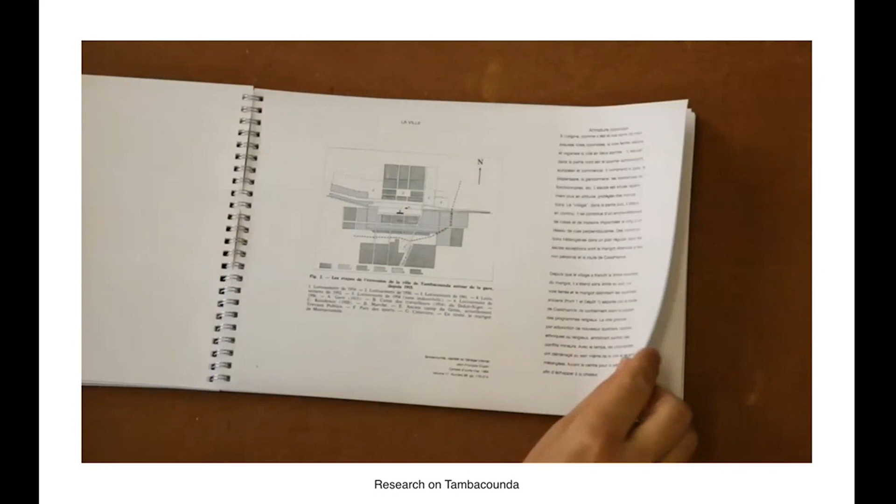So instead of coming with a design proposal, I said, let's meet and come with a team of colleagues and people from my office, and let's study everything about the area. So we looked at the history of the city. We looked at building materials. We looked at local resources. We looked at climate. We looked at the cultural production, the music, the food, and so on.

We tried to learn as much as possible, and we put it together in this kind of book of research, maybe 200 pages. And then we spoke with the doctors, the head of maternity, head of pediatrics, and we asked them, what do you actually need? We asked the nurses, what is the flow of stuff through the hospital?

If you were to draw your hospital, what would it look like? What is the kind of flow of people and of things through the building? And they sketched it out. So this is exactly the sketches that the doctors, heads of their departments, traced on paper, and in a way, we just translated it into, let's say, a more regular flow chart, one can say.

And we spoke with administration and the contractors, potential contractors, and so on. And only then we went back to Switzerland and sat down and thought, okay, with all of this accumulated information, what can we do? What would be, let's say, a wise or interesting step to start developing a design? So this was very, very important for us. We don't start with design. We start with listening or with observing.

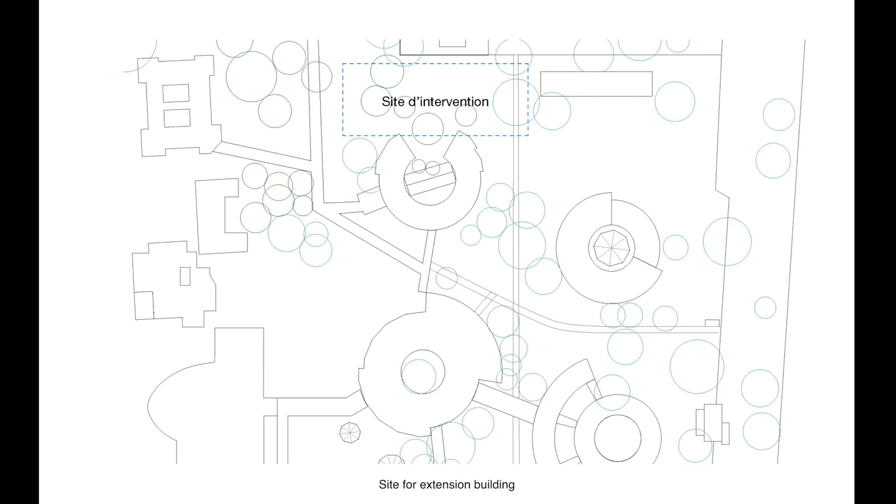And then eventually we, of course, did develop a design proposal. After several weeks, we were given a site which was on the north of this arrangement of circular existing buildings, and our design proposal was based on two main form-giving factors. One is, we said we wanted to make the building as long as possible, and we wanted to make the building as narrow or as thin as possible.

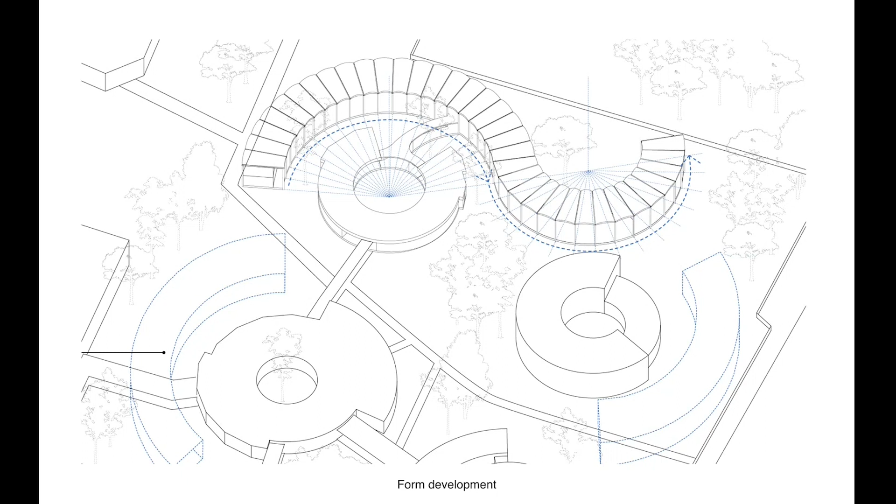And then, of course, the third element that comes in is this circular or curvilinear shape that is a reaction to the existing context, to the circular buildings that it embraces, wraps around, creating new spaces, new courtyards, and could potentially also in the future be used as further extensions. But going back to the idea of making a building as long as possible and as thin as possible, the length is in a way a function of social interaction.

When patients come to the hospital, they don't come on their own. And they often come from quite far away. They come from villages that are a couple of hours of drive or maybe a day of travel, and they usually come with their families. So it's a hospital with about 150 beds, and you can imagine that if everybody comes with a family, there's a lot of people.

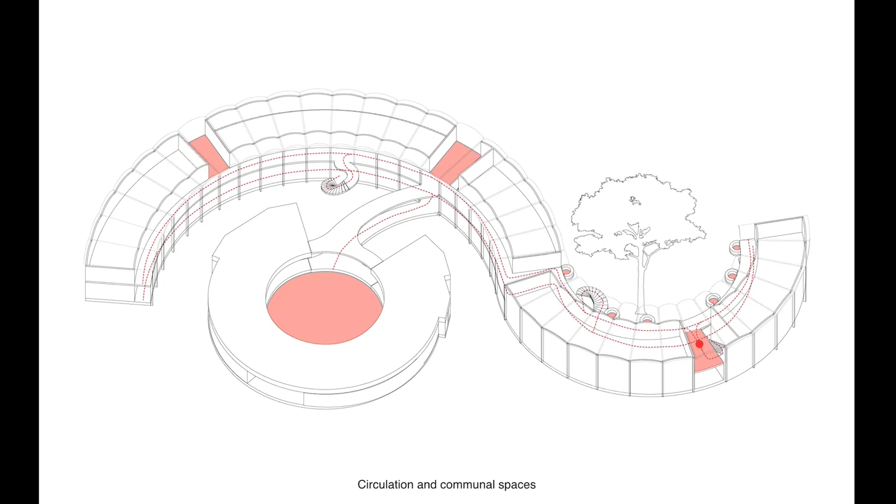So we wanted to create a lot of social spaces for interaction, spaces for lingering, spaces for waiting, spaces for playing, new courtyards, spaces of different sizes, large and small, extroverted and introverted. And this all takes place along this long corridor, long spine that is always on the concave side of the curve. And the thinness is in a way a function of climate, a reaction to climate.

We wanted to create a hospital building that is more or less independent of energy needs, that at least reduces the pressure and the demand on energy and reduces the demand on artificial cooling. So by making a building very narrow, we have a corridor and rooms only to one side. We could, through architecture, create a system of cross ventilation, where through a series of brise-soleil louvers and openings, the wind can pass through the building, keeping the rain out, keeping the sun out.

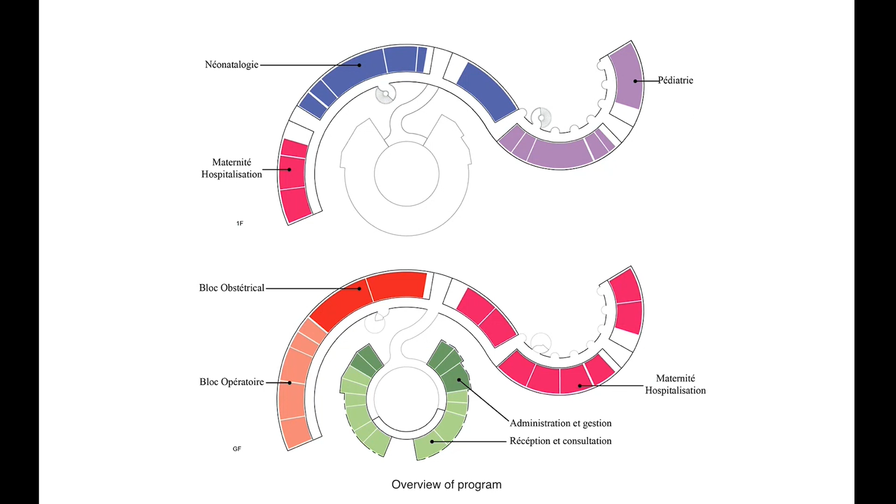Actually, Tambacounda is not only hot, but also there's very little wind. And through this brise-soleil, we create temperature difference, and temperature difference translates into air movement, and therefore the building itself becomes a little bit of its own climate machine, or creates its own microclimate, because there's always different parts of the building that are shaded or non-shaded, and then the air passing through the thinness of the building, with a double vaulted roof.

We have an exterior roof that protects from the sun, and an interior roof with openings. We also have a chimney effect and convection of air rising up. So these were all thoughts that we developed in a proposal, and we thought, we better test it out. There's a lot that depends on this brise-soleil wall: how much rain will pass through, how much sun will pass through, how much wind will pass through, and we were thinking that it's quite a risk, and we can't do that just from paper.

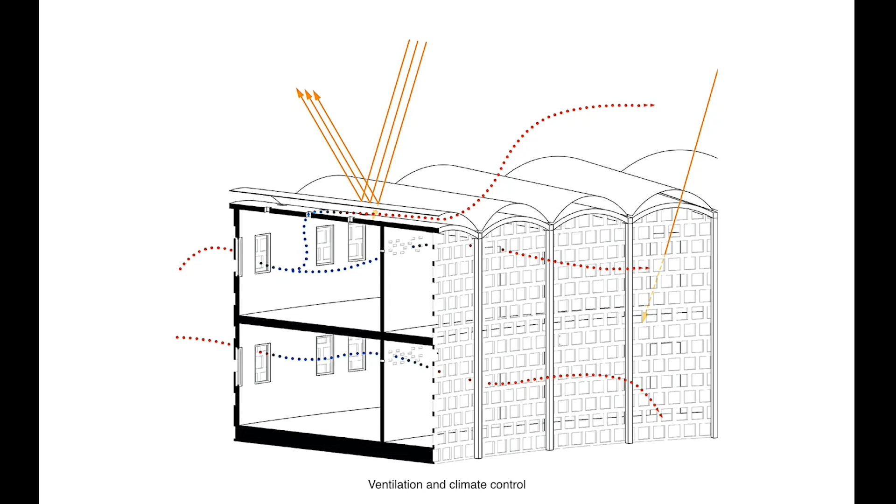So we developed something, or we proposed something that is very, let's say, coming from the logic of, again, without using too much cliches, a kind of Western perspective. We asked the contractor, can you build a test facade? Now, that's something very, very common. I guess you also have it here with many big buildings.

When you want to test how they will look in reality, you say, okay, I don't know, 10, 20 square meters, you build one-to-one exactly in the materiality, scale and so on, as the final building, to test on the site itself how that facade will look and perform. And that's exactly what we told Magueye Ba, the contractor.

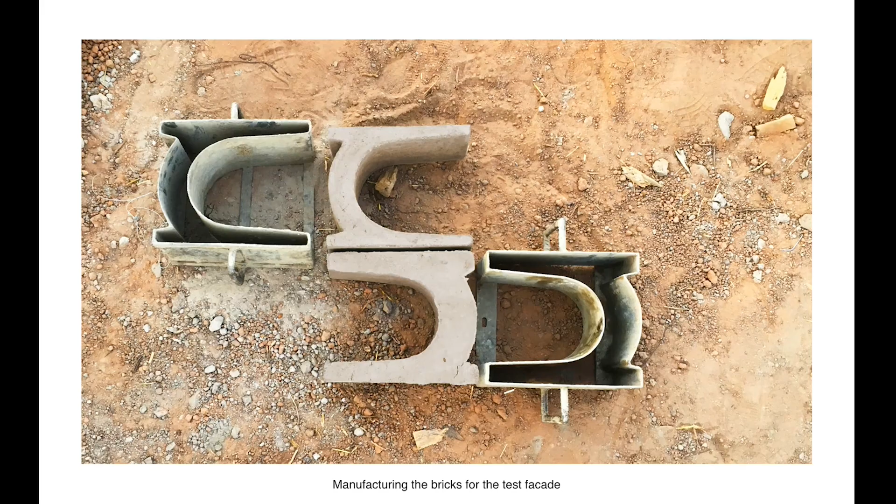I sent him drawings, 10 meters wide, 4 meters high, and I indicated the spot on the compound of the hospital where that test facade should be constructed, and different shapes of the perforated brick. And here you see two. We wanted to test out 4 different brick geometries with slightly different openings and slightly different geometries. How many bricks could you do per hour, and so on. And then a week or so later, he sent us back this photograph.

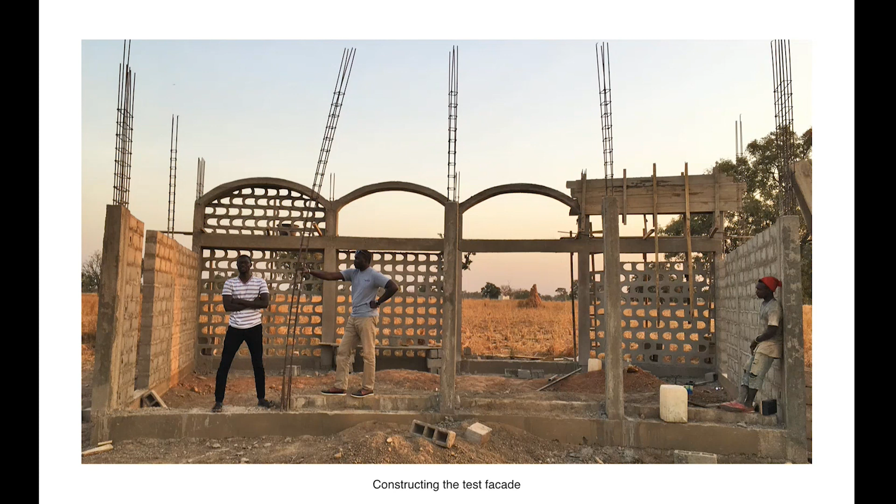And I thought, okay, looks good, but it's a little bit more than I sent him, because I had sent him a drawing that shows exactly this wall, but he was clearly building a little bit more than that. And I also noticed that the site is clearly not on the site of the hospital. It's somewhere else, I don't know where, but it's not the hospital site. Okay. And then another week or so later, he sent us back the finished wall, and it was this.

What in fact Magueye Ba had done was he knew that a small village 50 kilometers south of Tambacounda needed a school. And he thought, why do you build a test facade that you would look at for an hour or two and then tear down again if you can just extend the one wall by 3 other walls and put a roof over, and voila, you have a school.

So he kind of kidnapped the drawings for the test facade and by himself, quite sneakily, without telling me, created the school, which in a way is absolutely genius, because of course we get something that is of much more use, and now this village has a new school which is perfectly ventilated, and we can do a long-term study of how the bricks actually perform over time and in different seasons.

And in a way it's a beautiful way of doing architecture where you're not in control, where you have hybrid program, hybrid function, and hybrid authorship that in a way produces a result that is much more meaningful and maybe also much more beautiful than what I could have come up with or what I did come up with. And it is only through this kind of almost unknown collaboration, unknown to me, that produced this little school in Sarasidi.

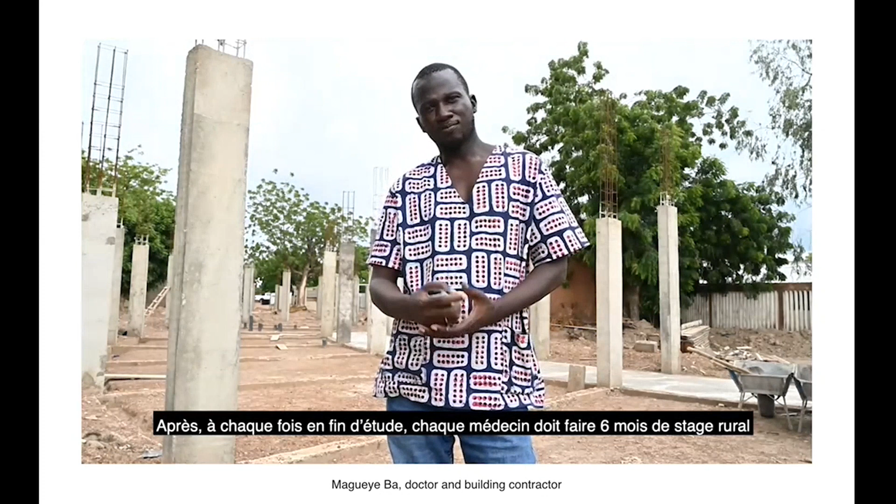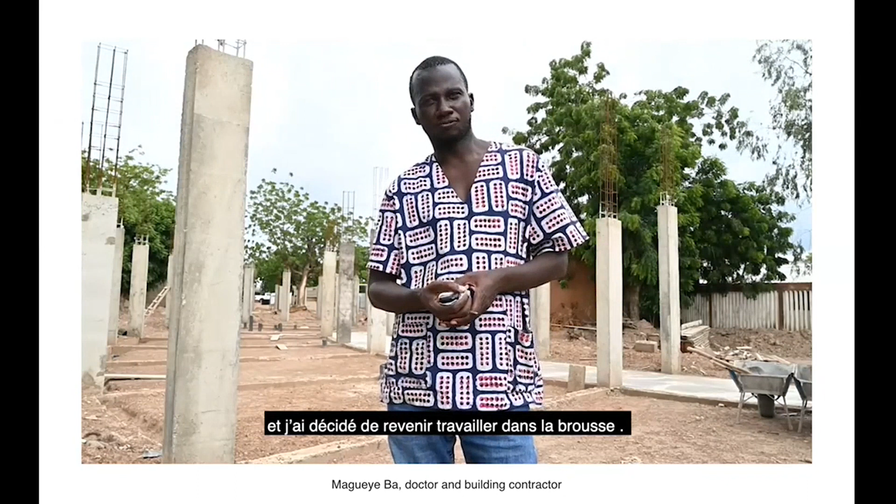This is Magueye Ba with a very cool shirt, who is the contractor, who in fact is not only a contractor, but who is also a medical doctor. So by daytime, he's a medical doctor in the villages south of Tambacounda, and because he was building clinics, rural clinics across eastern Senegal, he discovered, in a way, his talent of organizing construction sites, and discovered that this is also a second area where he can and wants to become active, so he is a medical doctor by daytime and a contractor by afternoon and evening time.

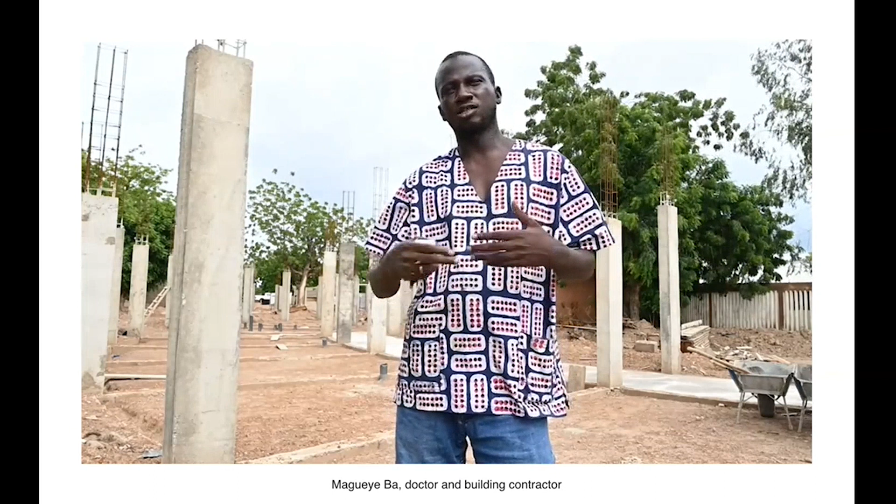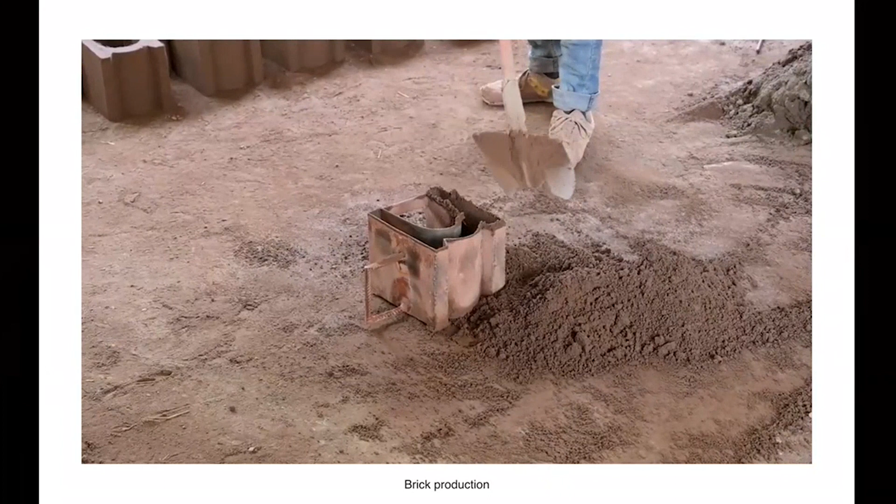And in a way, out of this initial, let's say, collaborative project, developed a wonderful collaboration overall in building the hospital, and eventually doing much more. It is based on this brick. The brick is, let's say, the smallest unit of this collaboration.

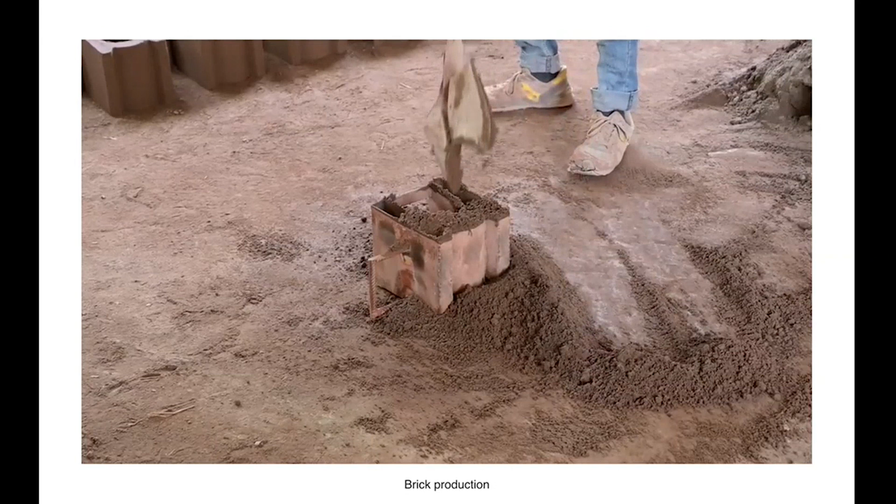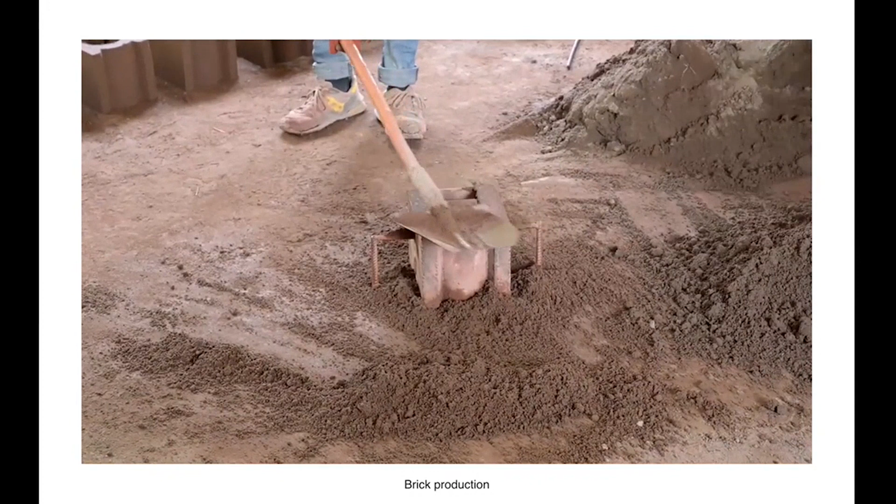It's a cement-based brick. It's not clay. It's not burnt in the oven. It's cement-based, so it's just compressed and dries in the sun, or dries in the air. And it is from this very shape that the construction workers produced eventually 40,000 bricks over the period of a year and a half, producing all the bricks for the hospital.

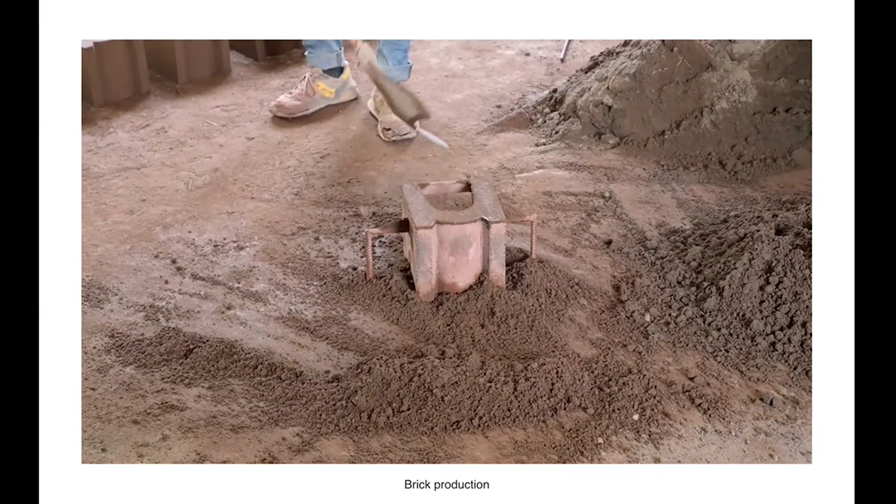I say this also because for us it was extremely important that everything is produced on site, that all the materials are coming from mostly eastern Senegal or the wider areas of Senegal. Nothing apart from the X-ray machine is imported into Senegal from other countries.

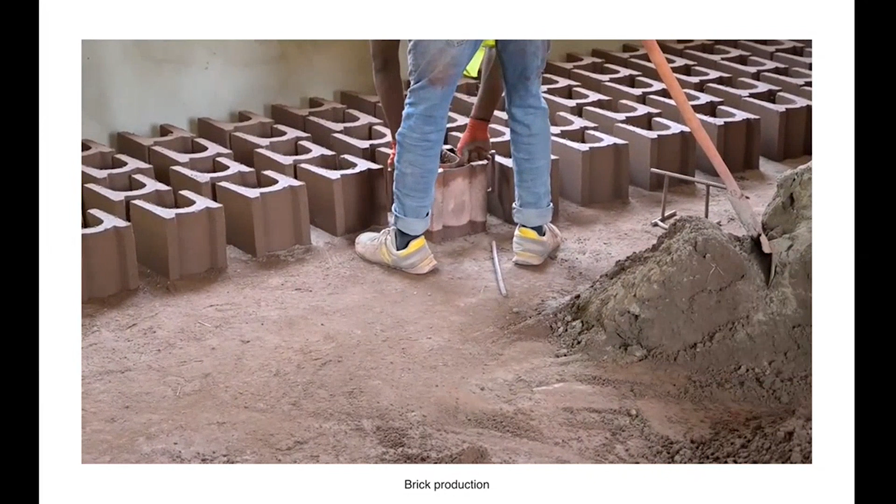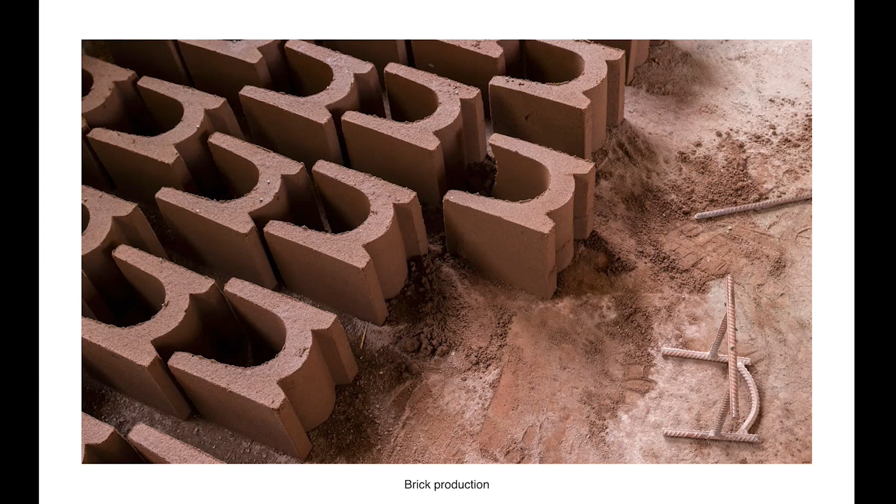We tried to produce everything with local resources. Eventually, as I said, the construction workers made many thousands of these bricks, and we started constructing and building the hospital.

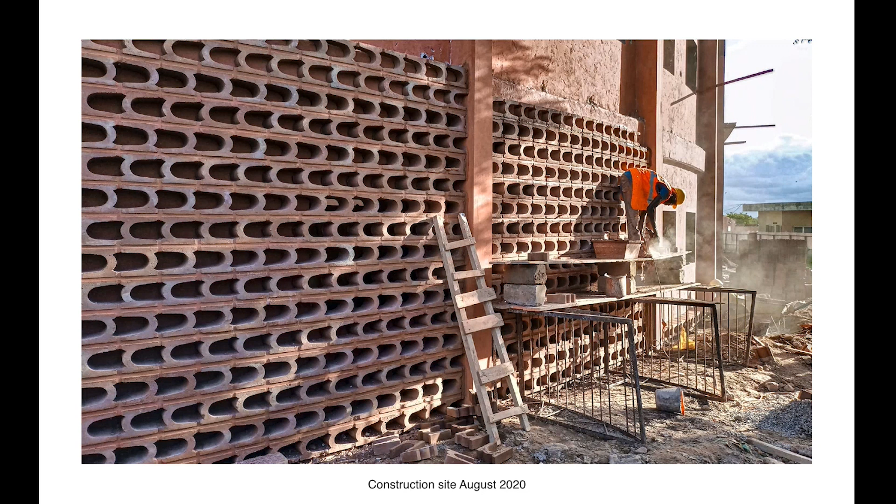And we worked with a foundation that had been active in Eastern Senegal for the last 15 years to develop additional programs. So what we are working on at the moment, for example, is staff housing for the medical staff of the hospital. Tambacounda, even though it's a fascinating city, is not very popular amongst many Senegalese doctors. The medical community mostly studies in Dakar and often has all their family in Dakar. And for them to live 8 hours away from Dakar is not so popular.

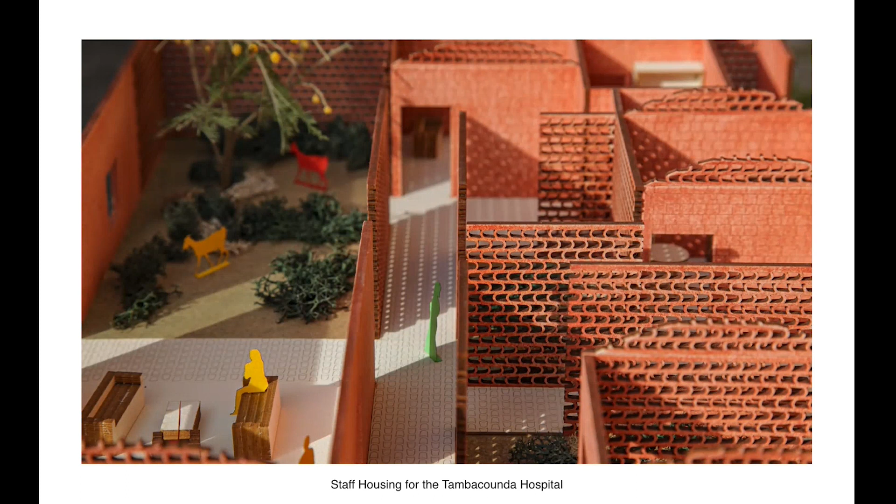And Tambacounda also doesn't have high quality apartments. So we thought by designing and building apartments, it will make the city more attractive to medical staff. It will enable medical staff to stay longer in Tambacounda, not giving up after half a year and moving back to Dakar, but maybe staying for 1 or 2 or 3 years. And this immediately translates into the quality of public health if the staff of the hospital is more stable and doesn't rotate so quickly. So this is something that we are working on at the moment.

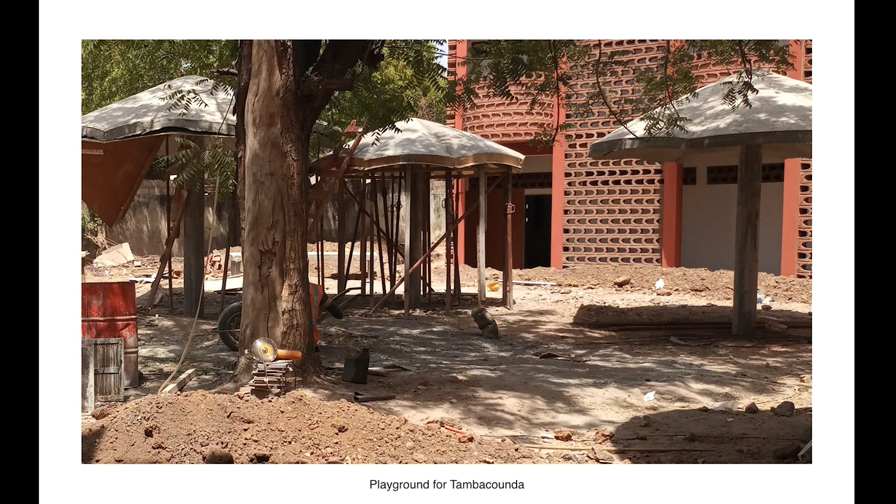When my wife and I got married during the construction period, we said to our wedding guests that we don't want presents, but please all donate your money, and from the money that we collect, we will build the first playground of Tambacounda, the first playground, in fact, in Eastern Senegal. We wanted a playground very close to the hospital that becomes an interface for the general population of Tambacounda to come and have their kids play, so that you always hear laughter next to the hospital, because I think this is very important. My little son had to test it out when he came for the opening.

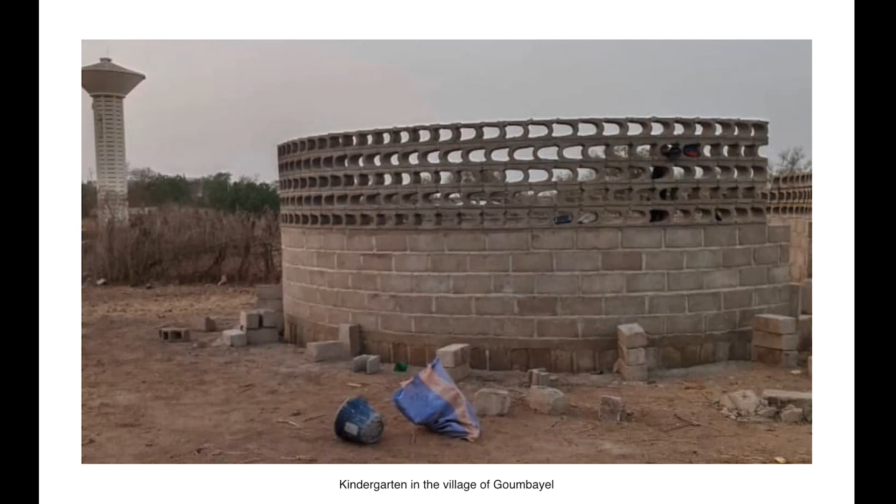The contractor Mageba really took a liking to the bricks. He thought they worked very well. And when he was asked independently of me to build several kindergartens in villages 20-30 kilometers south and east of Tambacounda, he took the brick and used it himself to design and build these kindergartens, like this one or this one just under construction. So the brick has become almost like a new local style, or a new vernacular that starts to infiltrate the region of Tambacounda.

We made sure that only craftsmen and construction workers from the region are building the hospital, the schools, the staff housing, and so on, so that all the money the foundation invests remains in the region and helps the region economically.

So what we end up with is not just an architectural project of one building in one city, but a range of spatial interventions from the very smallest unit of the brick to small and mid-size architectural interventions to regional interventions, working on a regional level through economy, but also through public health, to create a regional approach of how to intervene in Eastern Senegal, and how to tie together or embed this hospital with the local economy, local population, and local community.

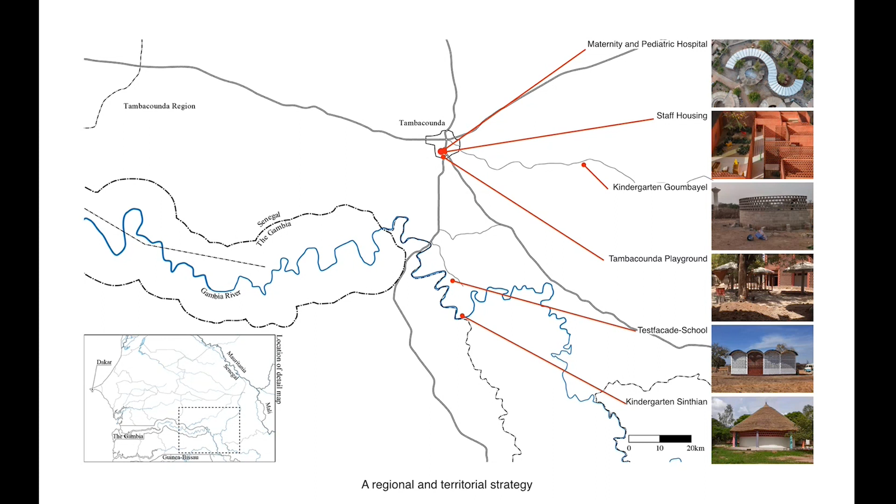And I thought that this is extremely important, that this is not an alien coming from the outside being dropped by helicopter, but actually a very extended, long process that this necessitates. The hospital by now has been completed. It was built over a period of about 2 years, almost exactly coinciding with COVID, with the pandemic.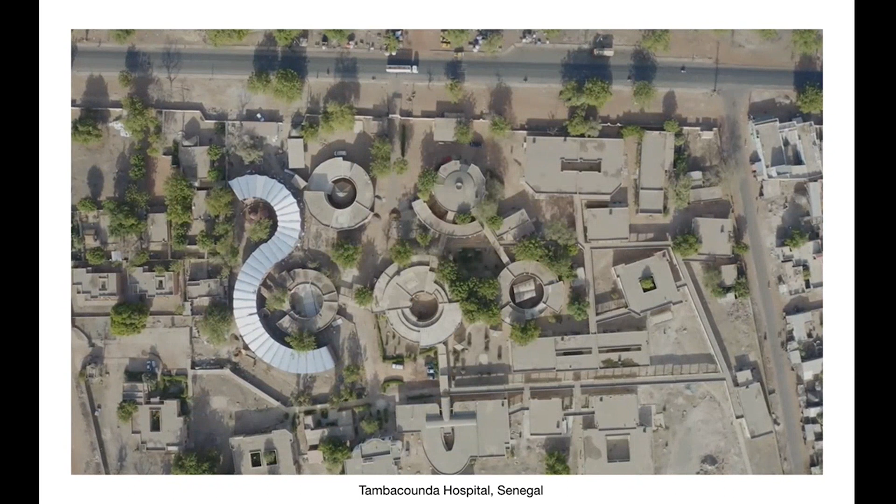Here you see it from the air, and a small animation or video of also again how the hospital is in a way embedded in a local, let's say, community and local climate. And a last view over this quite magnificent city of Tambacounda.

Let's change locations. Let's change sides. We go to Ukraine. We go to Kyiv. We go to Babyn Yar. It was in 1941, in September 1941, that the German Nazi Wehrmacht invaded Ukraine, coming from the west, crossing the border from Poland into Ukraine, and moving on towards the east, towards Kyiv, the capital of Ukraine.

Moving through this urban and rural territory, the Wehrmacht left behind them a trail of destruction and murder. Through every village that they moved through, they singled out the Jewish population, brought them into the forest, and killed them, shot them. It's an uncountable number of people getting killed by the German army moving through the country, and it's a kind of anonymous killing, leaving almost no trace, and the corpses disintegrating in the forests outside of the villages.

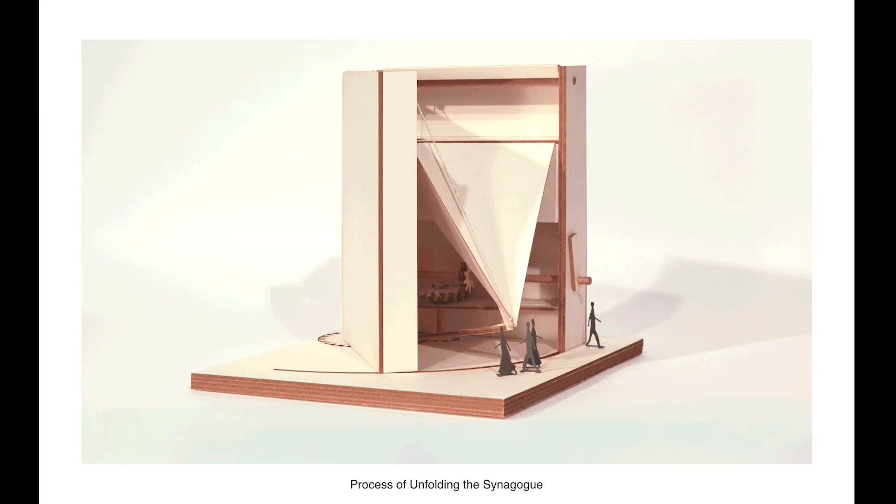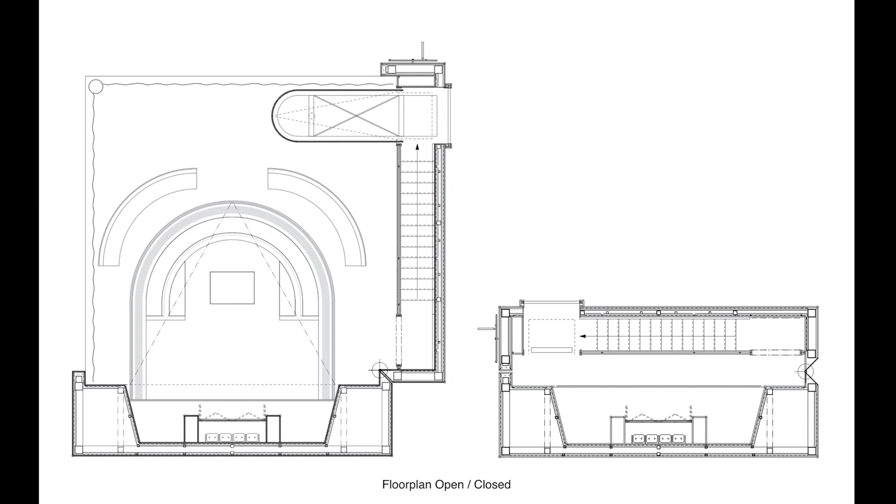And in a way, that's exactly what is happening in these pop-up books, because you open them up and they unfold a universe that you didn't expect and that you want to discover, and you discover by putting your nose in and really climbing into them. So I thought, let's do exactly that. Let's make a building that opens up. It's easy. Of course, it's not. So we designed a building that really opens up. It's quite large, 12 meters high, 8 meters wide. The walls are thick; they actually contain staircases and balconies and so on. And we built it. We built it all of wood.

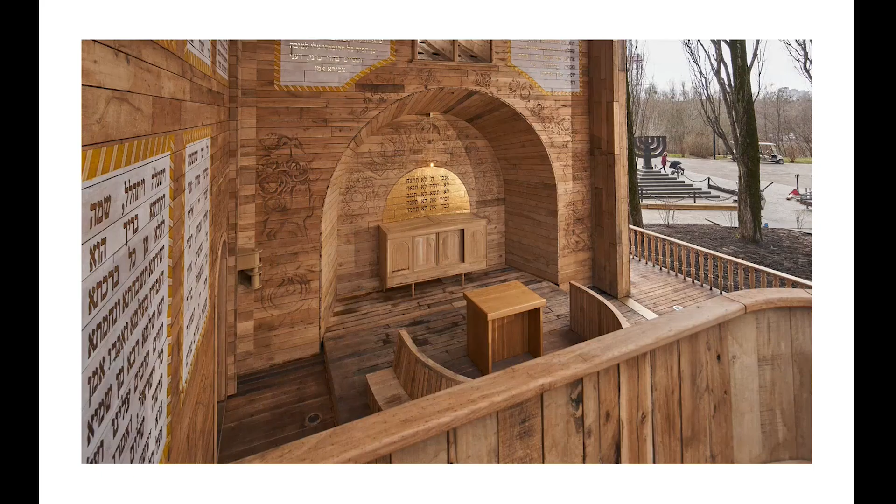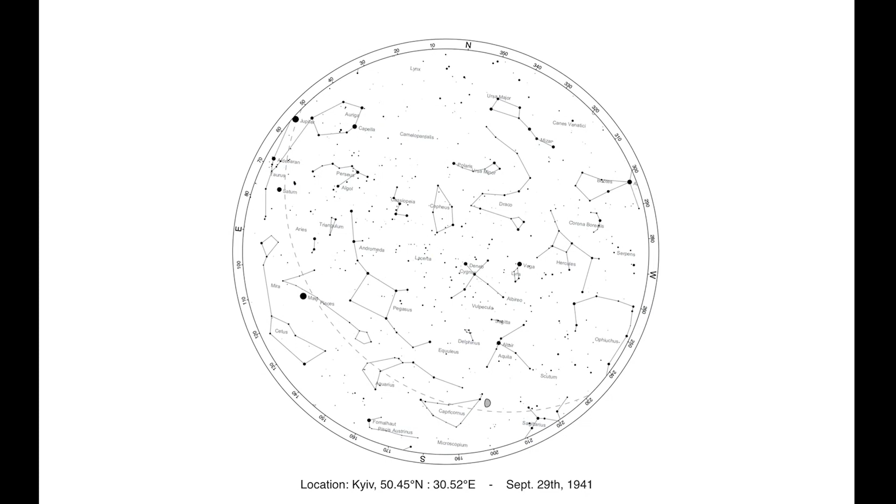I wanted to anchor the building very precisely in one point in time and one point in space. So we took the star constellation of the 29th of September 1941 that was visible over Kyiv. So it's in a way the last thing that the Jews saw before they were shot, and we turned it into a drawing that is almost scientific. Every flower is a star, every star is a flower. It's exactly the star constellation over the night sky of Kyiv when the massacre began, and this has been painted in collaboration with the Ukrainian artist onto the ceiling, and of course it's also beautiful, and maybe it links back to this thought of death and beauty in a kind of circle.

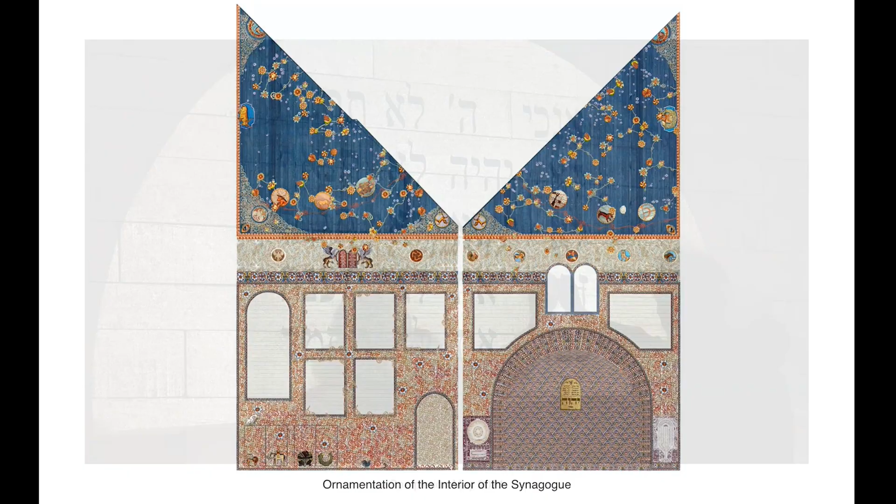We developed the design proposal for the overall wall, and the Ukrainian artist painted it over a very long period, several weeks, several months, until all the walls were covered. It's almost like a texture or text on the wood. The whole building is constructed out of wood, and for me this is very, very important, because, as I said in the beginning, maybe it's the most uncommon material for use in a memorial setting. Most memorials are made of concrete or stone. And with concrete or stone, you can build a memorial and come back 500 years later and it'll still be there. It won't have changed much.

But wood introduces a certain kind of fragility. It becomes fragile, and you need to take care of it every day. You need to repair it and oil it and kind of be nice to it. And in a way, maybe this is exactly what remembrance is, to take care of something every day. So I thought maybe wood, in fact, is the most commemorative material for commemorative architecture, even though it's maybe the most unusual one.

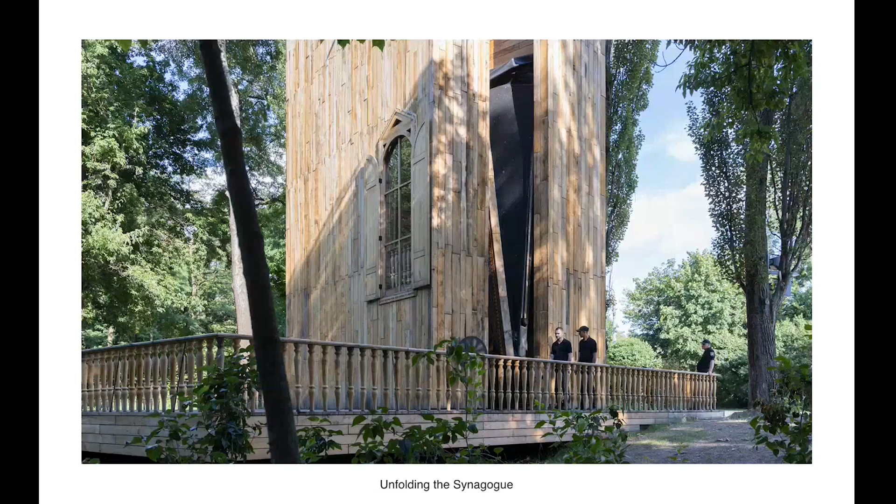The building was completed summer, autumn last year. It actually opens. It kind of hovers slightly above the ground, because we didn't want to disturb the ground that has seen so much death even further. And it's actually used as a synagogue. The chief rabbi of Ukraine is in charge, and at least up to the war, had a quite dense program of events and religious services and seminars and so on. It sits a little bit like a house in the forest.

And when you read them, there's this kind of almost unbearable darkness of the stories being told of what we as human beings are capable of committing, what kind of crime we are able to commit, and it's inside of us. It's not an alien race that made this. It's us people, us human beings who did it. Reading this really brings you to this kind of extreme darkness of what we are capable of doing.

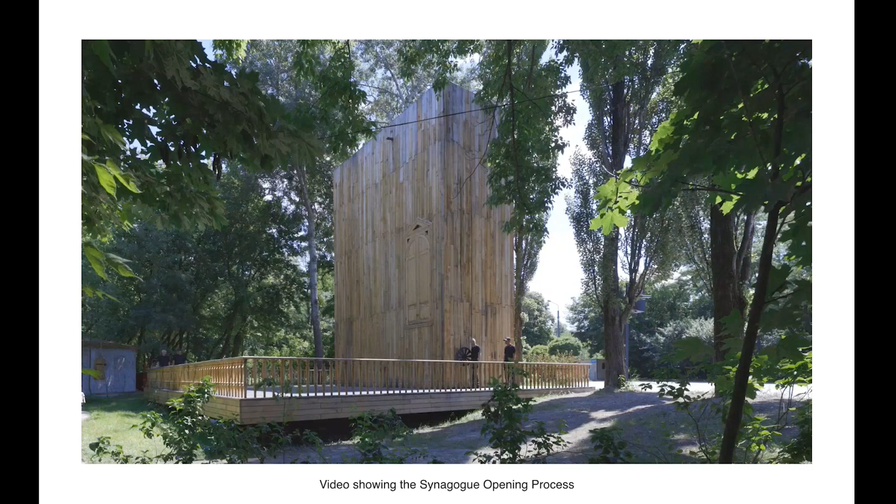But at the same time, I was looking into the eyes of my little son, who was born, and who was so happy to be alive, so happy to be on this planet, and who was enjoying life so much. He was laughing. And I thought, no, this tells me a lot, that this building cannot be only about death and dying. It has to be about the future, and it has to be about, in a way, celebrating the beauty of life. And that's, in a way, what the building is supposed to do.

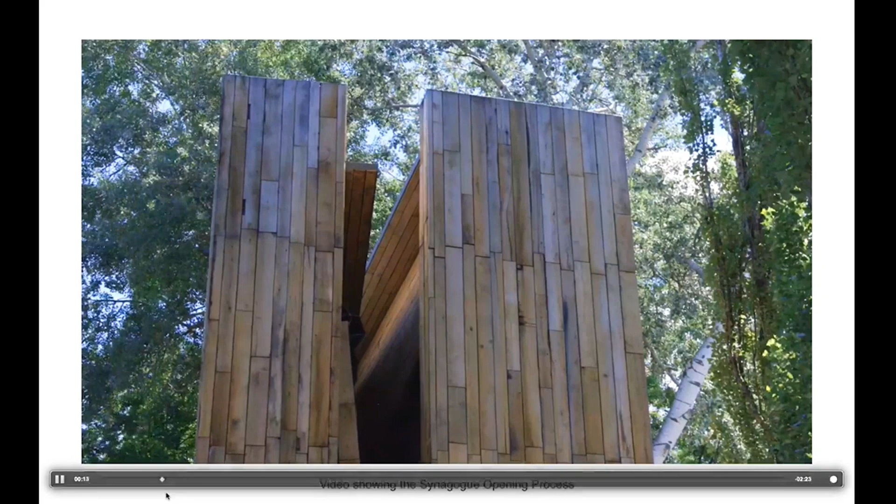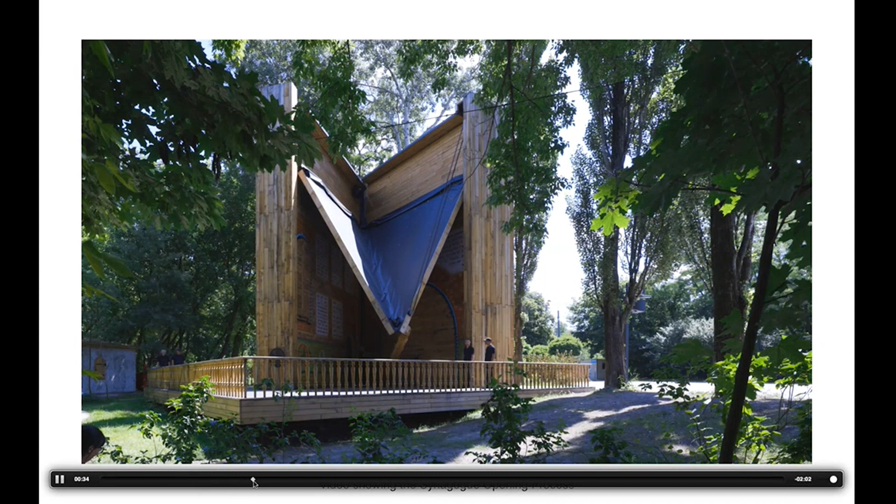So it really kind of opens. See, it's a manual process. It's not at the press of a button. It takes 10, 15, 20 minutes. You have to do it in a team of people. It's a kind of mechanic thing. Speed up a bit. It's of course also a spectacle, and there's, let's say, a storytelling in it. The opening process itself is almost like telling a story.

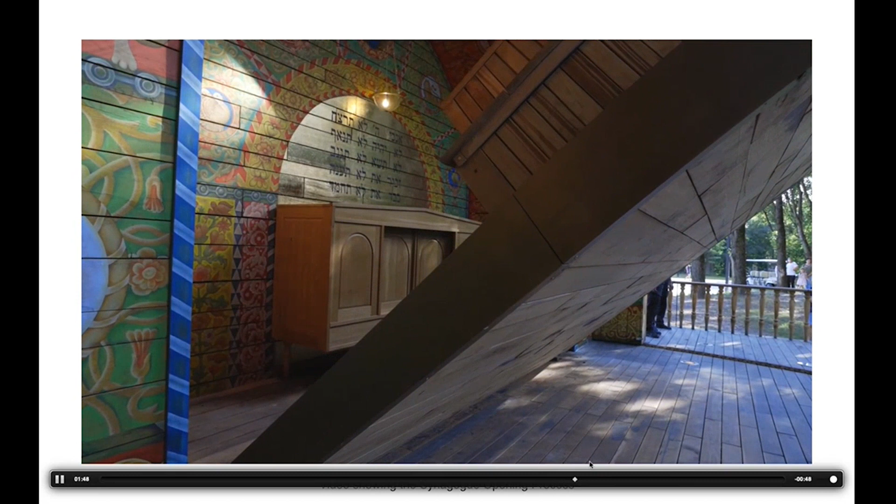And it's bizarre or sad that war comes back exactly to the location where this massacre had taken place 80 years earlier, as if we really don't learn anything from history, or it shows us that at least in Europe, a continent that is so full of wars, maybe it is not a coincidence that war revisits again and again the same locations where war has taken place earlier. Maybe it's a very typical thing for Europe.